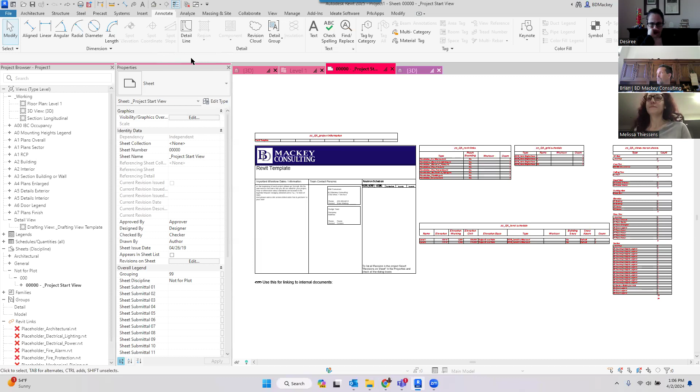The one I noticed right before we started is they're calling it interface enhancements. For those who don't know, Autodesk's eventual goal is to get rid of the options bar, the line of data you get down here. So if I switch to a floor plan and grab something modeled, you'll see the modify wall here, but there's no longer anything there. If we start the wall tool though, we'll see there are options down here. Autodesk is trying to move everything from the options bar either to the ribbon or to the properties.

When I looked at the help, I saw a couple things they've gotten rid of from the options bar and moved to the ribbon or the properties palette. Oh good, the ellipse FYI is one. That's good, they moved the ellipse. Yeah, I didn't even know.

A lot of them are just stupid little buttons they've moved. Like when they did Align a while back, that actually moved then, and the Align one pissed me off. I was not a happy camper because Align used to have the multiple alignments and the lock all down here. Now since it's a ribbon button, it's a separate tool. So when I'm in sketch mode, the align is a separate tool, and I keep having to bounce back between finish sketch and modify align. So this one I was actually upset with. The rest I'm like whatever, but this one added more clicks for me.

But yes, those things are slowly going away. Autodesk eventually wants to get rid of the options bar entirely. They've said that, but I don't think it's going to happen any time in the next decade, to tell you the truth. As they make modifications, I get back that precious 3 millimeters of screen space. Next screen space, yeah, exactly.

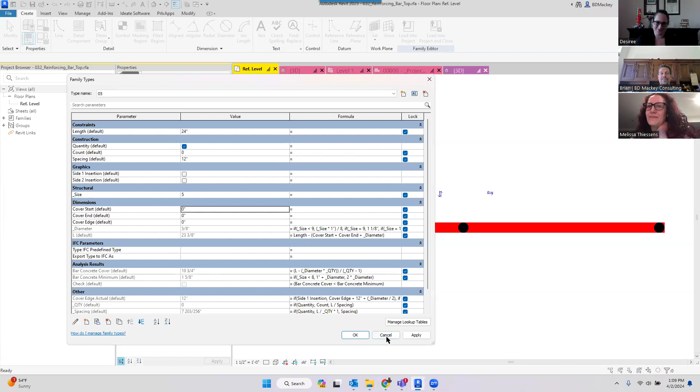So I started to realize on a lot of my families, holy crap, that's not really going to work for me because I'm using that quantity check in formulas.

However, I did have one that I did just open up quickly and it did work. On this one here that I opened up and played with, I have a masking region over the top of a filled region to represent my brick quantities.

If I came in here and I have like a king size brick - wrong button - let me look at that king size brick, which I probably have in a type catalog, where I had like 5 holes. Cool, here's my 5 holes. I hit apply, now it's giving me the 5 holes.

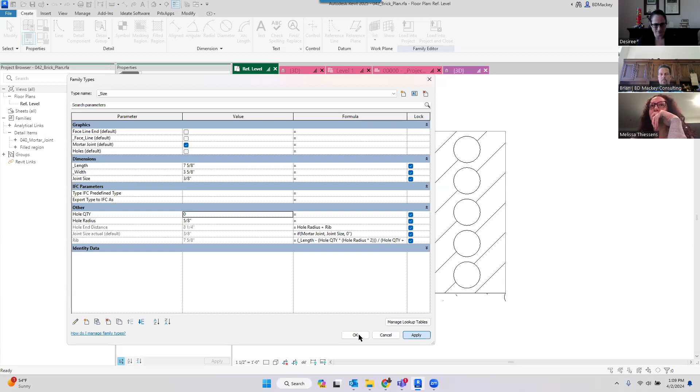But the nice part is now if I come down here and say, cool, I want 0 holes, it will allow me to do that without breaking. All it's doing is turning the visibility on to these.

So it's a little bit weird that the visible button is still visible, but when you're taking that array down to a value of 0 or 1, it's going to automatically take the ones in the array and basically say, cool, we're going to go in here and start looking at those.

So I thought it was kind of weird that it's just graying it out. Is it just excluding it? Nope, it's not excluding. I was wondering if it was looking at it as a group, because when I tab selected that, I got the group icon, which I didn't notice before.

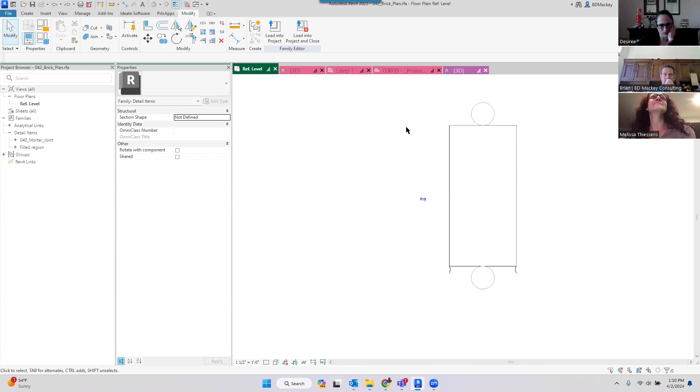Is that because you have your array defined first to last? I wonder if it would do something different if it was first to second. I don't think so, because if I come back in here, we can actually change that in play.

If I come in here and said, oh no, give me an array of 1, I can say okay, and then mine does center it, and then it does make that black again. So it's nice to see that I actually had formulas in here to move it to the right location. Ooh, if there's only 1 hole in this brick, it centers it.

Kind of cool. But I do think it is going to take some of these families getting into them and looking at, hey, what do we got going on? What are we doing here?

It was kind of the same thing as like when I was - nope, not that one. Dang it, wrong family. Recording in progress. Oh, Melissa's now in here twice. I'm muting the other Melissa. There we go.

So it was funny when I came back in here, like I said, I went to my recents, I looked at this void form one. This is one, and I'll show you kind of the steps that I usually do. If I look up at this array, I've got one called quantity actual.

Most of the times what I've done is I've created one that basically says if the quantity is less than 2, give me 2, otherwise use the value. That's how I've been able to come through here and say, oh cool, somebody came in here and gave me a quantity of 2, which in this case is all based off of the length.

If my length came down here and went to 12, then my quantity is going to go to 2. If my length went to 8, my quantity technically goes to 1. But this one says, yeah, no, screw you, I've got to make it 2 anyway.

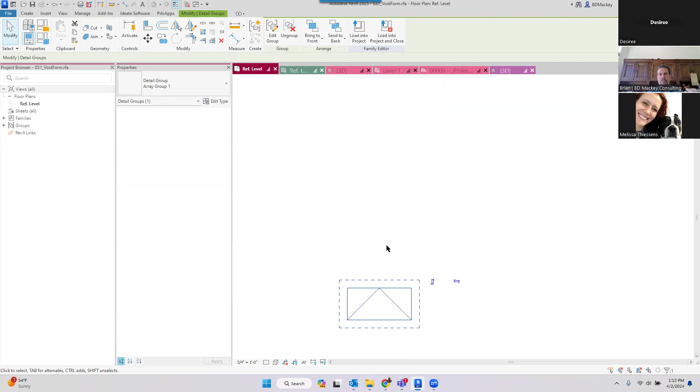And then what I've done is I usually have - it's actually working here - values where I have another instance on top of it. And as Desiree has found a couple times, that sometimes results in double counting. What's happening here is the two that I'm getting are literally just going on top of each other.

So I've got a value here where my array - I'm gonna go change my length value to be like 16 or something again, whatever. My length value here starts coming in, and it's just doing a first to last - they go on top of each other. So when I give it a value of 1 inside of there, it actually puts 2 on top of each other. But now, oops, cancel that.

If I come back here and grab this and just say, cool, let's just use the actual quantity button, not the one where I'm saying make this 2.

That instantly would have broke us in the past. If my quantity would have come down to be a 2 or a 1 value that was associated to an array, it would just break. Wow, there's only an array of 1 here - I would break. That's what I'm using.

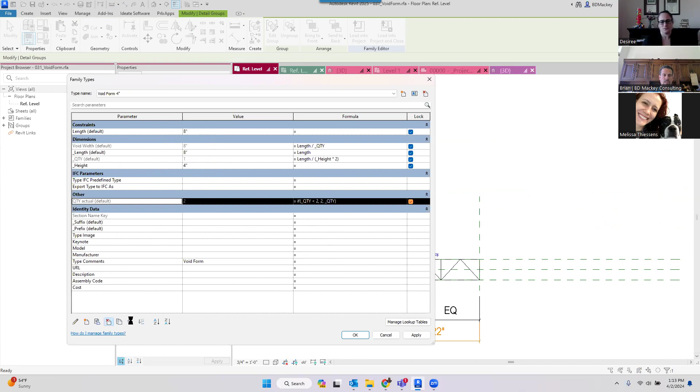I'm no longer using this one, so I'll delete it. It's now going to let me do that, right? You can see there's the gray one on top, but there's still the black one beyond. So they're just hiding those values and making work.

This is the one for me that, like I said, I'm going to be super excited about. I just thought of a family I could go open. If what it's doing for 0 is just moving away, I wonder if it's not going to solve the double counting anomaly. It's turning it off, but yes, I don't know. So I'm gonna have to go in and actually - good question. I'm gonna have to go in there and start to see.

We'll go to 23. I just thought of one that I could actually open and play with this one where I have things on top of each other. Furniture - it doesn't always double count. It's weird, like sometimes something breaks it.

I don't have that problem as much. So here's a perfect example: you can see I've got these two that are part of an array, and if I hide those two, this one's just an individual one. And this one's just got a visible parameter to it that basically says, hey, Chair End 2 single, right?

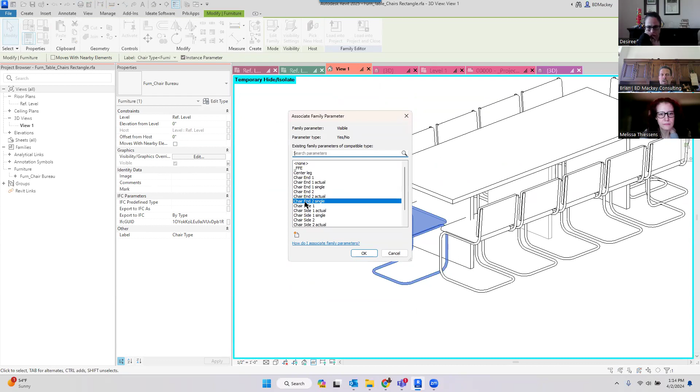If I go look at this one, the Chair End 2 single is basically coming in here, and it's a formula saying if chair quantity equals 1, turn it on. If it equals 2, turn it off, or inverse that, whichever. So we've got that basically setting up here for the single value.

So now I don't think I would have to do that, because if I take this one and just delete it and we go back to the restore, if I now were to come into my chair - I'm not sure which one I did, which value is this one? Chair end quantity - so just chair end. Wasn't sure if I had one for each. Wait, did I say chair end 1 or chair end 2? Chair end quantity, actual 2, so it's chair 2.

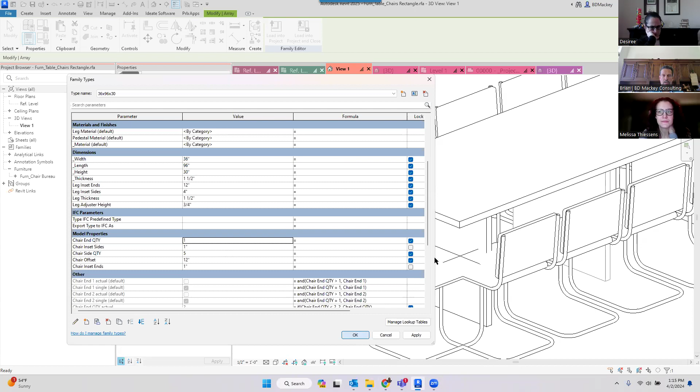So if I come over here now to chair side quantity and chair end quantity, if I were to make this 1, theoretically - well, it's still going to show me 2 because I've got to go fix the formula. Hold on, let's just go back and make this one just chair end. Chair end, quantity of 1. You'll see it's just graying out that one.

Wow, that's not centering it. No, it's because the way I set this - because again, I probably did this one, I just said, hey, align it to the ends and call it a day, and that's all I cared about. But so again, this sounds great.

We can now have 0s and 1s. I'm gonna have to go back and rethink some of these, like if I only want 1 chair in here. But now I'm not gonna get that stupid warning - oh, results will count in double counting because there's elements on top of each other, where I was putting them on top of each other.

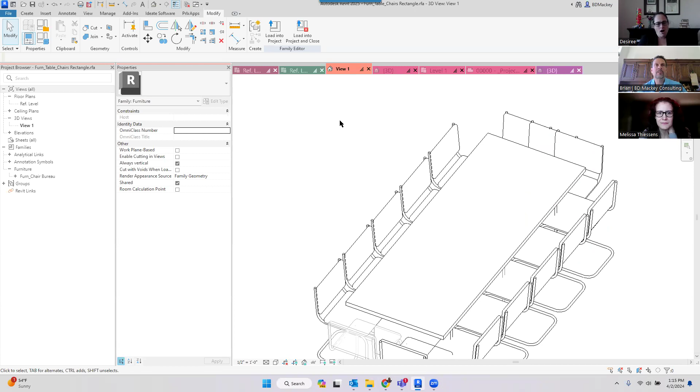So hopefully we'll be able to play with this. I don't know how much. It's kind of like when we originally got the - when you have a void, you could say cuts geometry or not on the void. I didn't fix a whole lot of my families where I was moving the voids up and off because I'm kind of like, is it worth it? I don't know. If I readdress those families, I'll go back.

But to me, that was one of the big ones. Feels a little like future families will benefit, but maybe not worth going and breaking all your old stuff. Yeah, that's kind of what I mean.

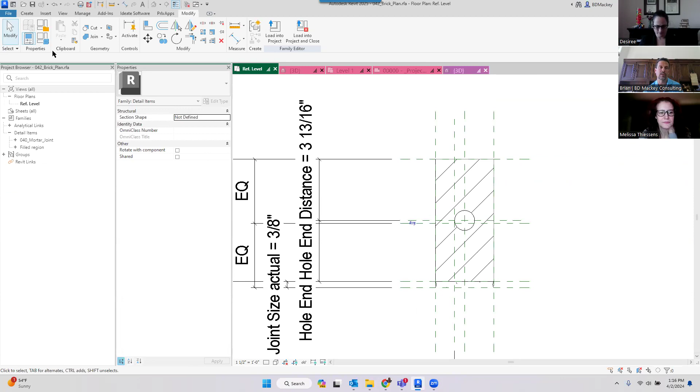Some of these I might go in and play where I know I'm having issues. And this one, the only reason I'll go into VG and turn on all the annotated stuff - this one moves the circles outside. So like I said, I haven't totally played with this, but that's only because it's moving the circles to the outside when I make that value 0 because of how I've got this set up.

Oh, an O is not a 0. Close, I hate it. I hate the O key right next to the 0 key. So that's the only reason, because I actually have some sort of value here. It's like, hey, take it. So I'm technically moving it past the other end, and the way my formula is set up for the hole

Distance. I don't think this is going to affect the family, but again, we load it in. If I now can start aligning to this reference plane or whatever, it might blow it up. But so that's there. That was kind of one of the ones I was really, really looking into. So a couple of the other tools that they've got.

I don't know if I like this tool. I've been very adamant in the beta forums that I'm not sure if this is a great tool, but one of the tools that they have now is when you're creating a wall, you have this auto join or auto join and lock.

So this auto join and lock, what it means is that, hey, if I come in here in a perfect case like this, I've got this wall here. If I come in here and model this with the auto join and lock turned on, now if this wall moves, did I not have it checked?

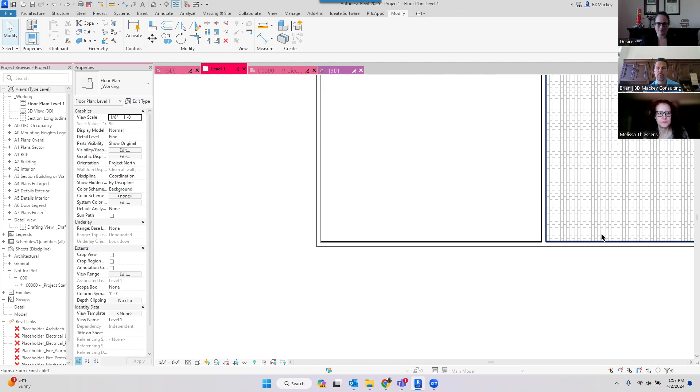Let me try that again. I probably deselected it. Let's go to the wall command. I probably turned it off. It is not highlighted, so if I turn it back on, it's got to be highlighted.

Very simplistic. I don't also like the interface here. It's pretty non-apparent that that's there or not.

So if I come in here and click this and I go across, right? Now it was turned on. You'll see that I now get the padlock, so that wall has been constrained. So if I move this wall, the one that's been auto joined and locked works.

The other theory on it is if I go create similar for a door, theoretically it's been auto joined. So if I put a door in here, then theoretically it should cut the opening out.

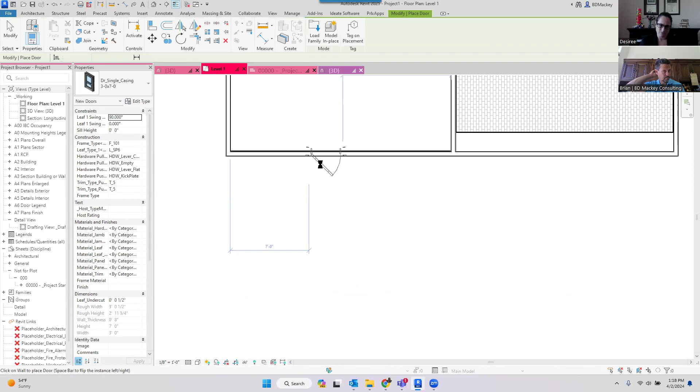This is the- I probably hosted it into the thin wall. Let's try that again. I'll host it into the fat wall, not the thin wall.

Actually, I wanted to use a different door because I did try it with that door earlier, and it was not working earlier, which I want to see- I want to see if I've already found a broke feature on this.

I just want my door single. Sure, the door double will work too.

So this is the thing I said, theoretically it's joined, so that should be getting cut out. I have not had that work for me. And if I go back to do the join tool, it's already thinking they're joined, so I can't join this wall to this wall because they're already joined.

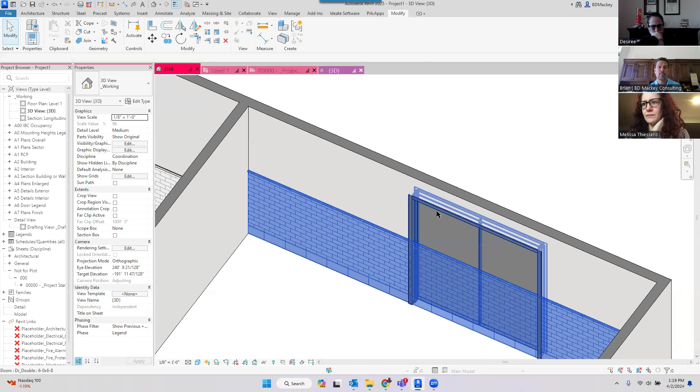But for me, this new feature has not been working in my template. I haven't tried it with out of the box, but if I add a door later, I have not been seeing that that's working for me.

So we'll do a new wall that there's a door already in there. Auto join and lock is on. It's not joining for me. I'll try it. So this is me in my template. It might be working out of the box template.

So that was kind of the things for me. Worked out of the box. The other thing, let's pull one of these walls back.

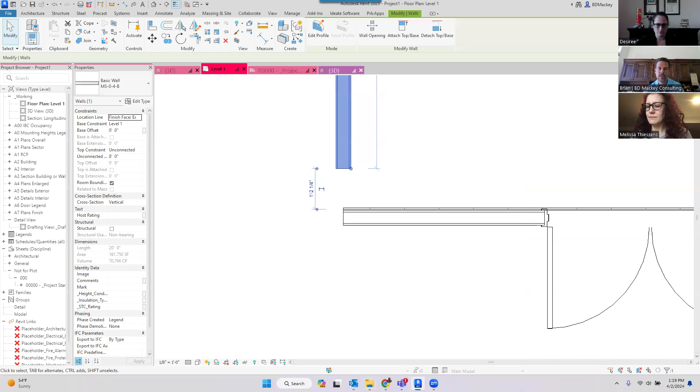The other thing that we'll start to see inside of here too, theoretically now there is the auto wrap feature. So if I go back to the helps- that's not the helps. If I go back to the help button down here, the other one they had is create walls. Nope, not that one. Where is it?

Yeah, in canvas wrapping, wall wrapping controls. So theoretically now, the way we get the wall that can wrap at the end, we should be able to come through here and start saying, no, I don't want, or I do want that to wrap, which to me, this is a big deal. I have a lot of clients who create walls that have gypsum board on the end, then the identical wall that doesn't have that wrap happening on it for their floor plans.

So if I go edit the type of this wall, I think wrapping has to be turned on. So wrapping at ends, I'm going to say interior, sure. And now when I grab this wall, you'll see, since the wrapping has been turned on, you can choose to turn that on or off.

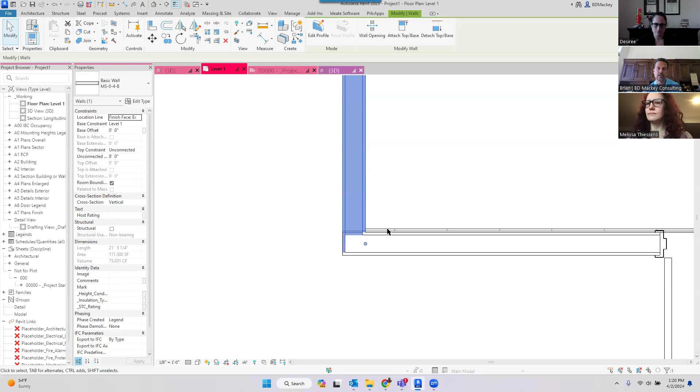To me, this is kind of one of the features I like. Obviously, you're only going to get that if the walls are unjoined. You're not going to get that if your walls are joined, etc. So that to me is a nice little feature they've added. I don't use a whole lot of this tag toggling, but now it's nice that you can go through and set that up.

The other thing that confused me slightly when I was in the beta is this join, or the auto join and lock up here, is different than the join status down here. This join status is talking about at the ends. This auto join up here is talking about walls parallel to each other. So I did think that was a little bit of a confusing part for me.

Is that architectural walls only? Like, join, yeah, because I just opened it to try it and it's not there for a structural wall. Is your auto wrap turned on? On the type properties of your wall. No, the auto join and lock button's only there for an architectural wall for me, so I don't know.

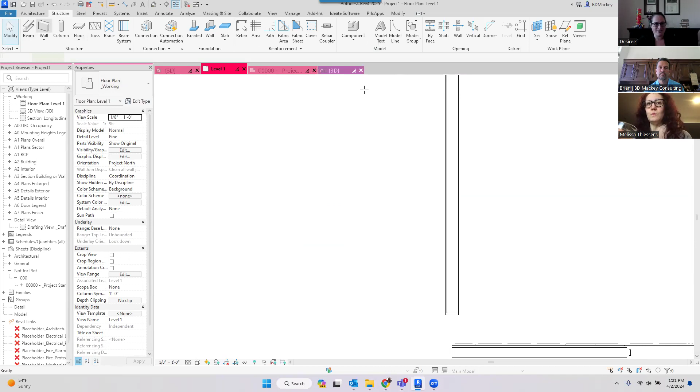Oh, let me see. Structural wall. So you're correct. Screw you, Autodesk. Why do you forget about the structural engineers?

Why are you not in the beta testing this stuff to tell them it doesn't count for structural walls? I don't have time. That's what I have you for.

Really? So you were correct. In the structural wall command, that feature is not there.

Kiana's crying right now. I can hear her.

That is dumb. What if I do it as architectural with the lock on and then switch it to structure? And then I do see that Javier posted a question in the chat. He doesn't use it because you can't actually snap to the stud end point.

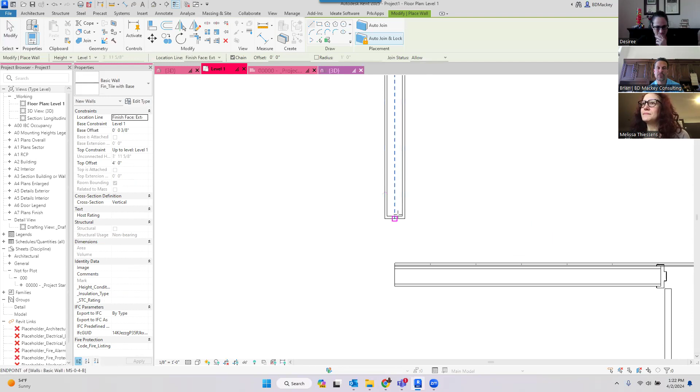You are correct. With Revit, this isn't actually modeling that. If we go back to 3D and look at it, it's not actually putting the gypsum board on the end of that wall. It's not doing that finish. It is just a graphic 2D representation in plan.

I will say Autodesk has been talking about actually making all the walls layered systems, not pseudo-layered systems like we currently have, literally to be more like the parts tool if we had the parts tool. That's kind of what their goal is going to be for this. I know it's a multi-year process, and I think some of these edits are what they're talking about with multi-layered walls when we get those. It's like theoretically I could model a wall and pull the gypsum board back.

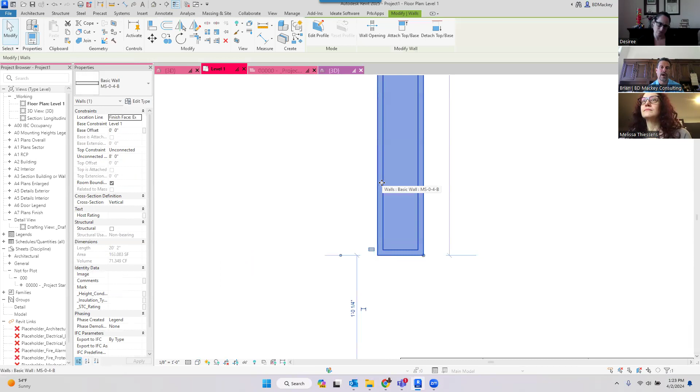That's something they've been discussing. I don't know how far out it is. It's in the ideas forum, it's been places that they're talking about it. So it is there that they're talking about it. So who knows?

Somebody asked, does this work with inserts too? I don't know. Let's go throw a door in here. Let's go to my door. Let's change this to be an inset door. And let's make sure we have the wall closure for the exterior.

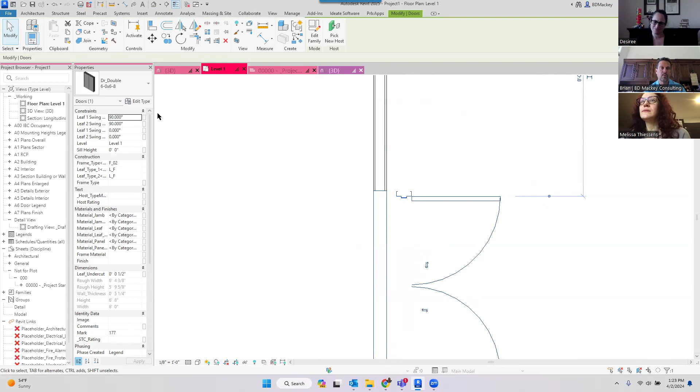Probably should be using it out of the box here to see if that works, but put it there. Let me add a type on that, and let me go make that distance. I have this on mine to be adjustable. I don't have it automatic. So let me just go through here and check.

I believe it's only on ends. So we've got that there. Now we pick the wall. Yeah, I don't believe it's at openings, I do believe it's only at the ends. But I wonder if that's because I'm doing that control via this.

Let's go to here, say edit type, and let's say wrapping at inserts, let's say both.

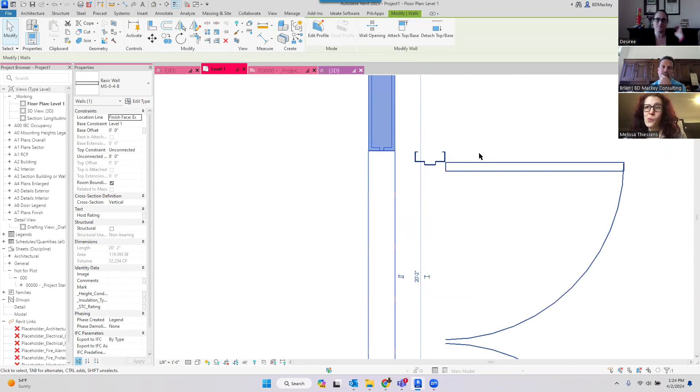Uh-oh, there it goes. Let's go to my door and change it to be by host. So, nope, does not give me the capability if it's built into the wall. So not at openings, only at ends.

It's not totally fully baked.

FYI, in case you didn't know, if you noticed I had my wall set to none, do not wrap at inserts. Most people don't know that any wall-hosted family with a door or window has an opening built into it. The opening allows you to choose what the wall closure is. By default, that comes up as by host, but you can switch it to whichever you want, or neither. So even if the host says wrap it, you can say no, don't wrap it here.

Don't remember who asked that question, but if you don't want this one door to have that wrapping, you can create a door type and set it to neither. Even if the wall has it, you can turn it off that way. That's always been there.

The door works in my template, as does modeling it as an architectural wall with auto join turned on and then changing it to structure. So it's now working with my door family, I just got to figure out why.

When I went to my simplified door—time to rebuild everything. Yeah, no, I don't use that tool anyway.

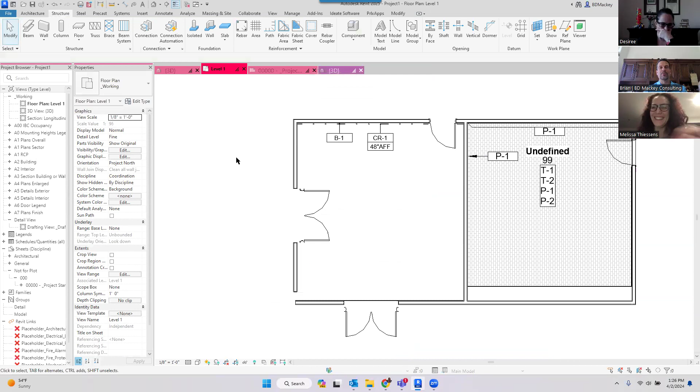I feel like I get all excited about something and then it's like, oh, but it only works 80% of what I need it for.

Beth asked, am I using voids or openings? Yes. If you hover over my family or select it, you see little blue rectangles, Beth. The opening cuts the wall, and then I have a void family built into my door that I use to cut the finishes. I think it's the wrong 3D view—I'm even using Neat UI with the color-coded 3D view, and I still can't click the right button.

Man, I was gonna say.

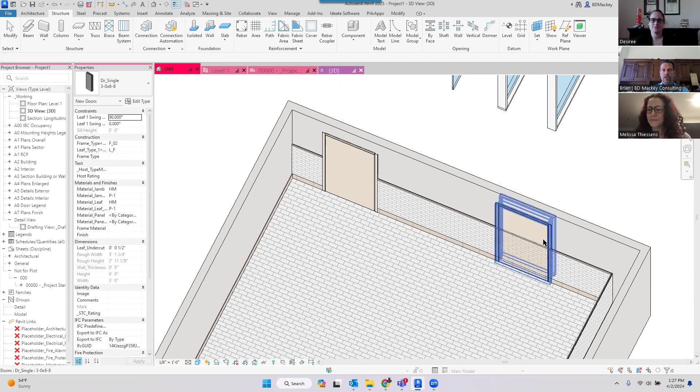So for me, when I place a door, I'll create a new one, put it in, and flip this door. One more flip—you'll see that when I go in there, it's actually cutting a hole through the wall, and I'm not cutting the finishes here. So for my door family, I built a void into it. Again, you can see the void if I hover over it, because I don't use join geometry here—because if I did...

If I come up here and say join this wall to this one, it breaks with my door. Undo that—let's join this wall to this one, the opposite direction. So my doors are just broken on the join in 25.

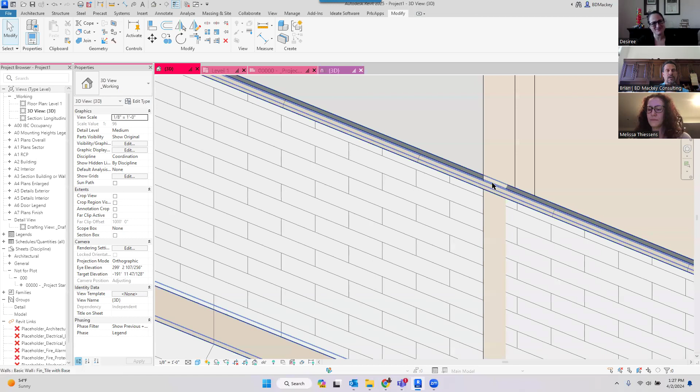But in 24, if I did that, this would go to where the opening is, so my little trim piece that comes across here would get cut halfway through the casing, which I don't want. So I built those void families in there so I can use the cut tool and say, let's cut this by the door.

Yeah, it's really freaking out. Let me go unjoin real quick—I should have really tried this in my 25. My family's in the 25 beta. So let me try the cut tool again and cut this by this. Sure, it's breaking, but that's theoretically what I did here. I'll have to see what's going on in my 25 stuff.

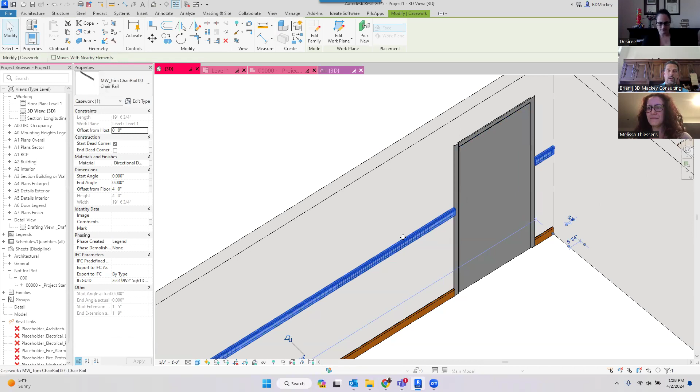So I use the cut tool so I can get this to cut where I want. The other reason is this is not a wall-based family—this is a generic model, or a casework family. If I wanted to cut those around the door as well, I can still use my cut tool utilizing those voids. That's why I do that, Bev—I build the voids independent of my openings so I can have a higher level of flexibility with that.

So any questions come up on the things we've been showing so far?

I guess Rick had one. So if you're using array as a void, like the sinkholes for a countertop, it will actually get rid of the holes if you say only one.

I don't know, I have not played with that yet, Rick. I don't imagine it would, because usually if a void is cutting something and you turn the void off, it's not cutting it. It's just telling you not to make that void visible. So I can't imagine, I guess we could try something real quick.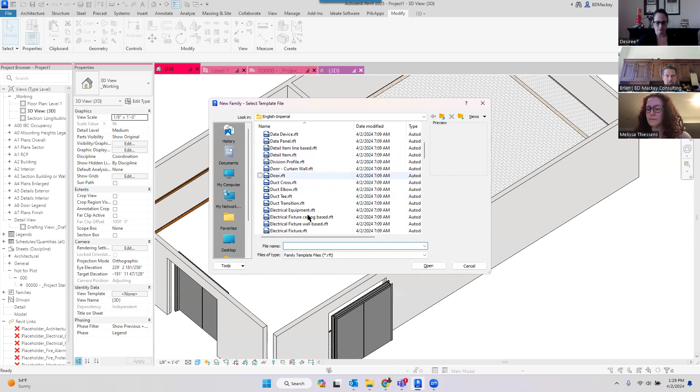Let's go do a family. New family. Generic model is fine. Not adaptive.

Let's create an extrusion. Let's do a rectangle. Woohoo, that's not a rectangle.

Has this always been up here? What's the depth, or is that new as well? I don't recall seeing depth in the options or in the ribbon as I've created extrusions or solids in the past, I've only been in the annotation family so far. No, I'm in 24, and prior was that there?

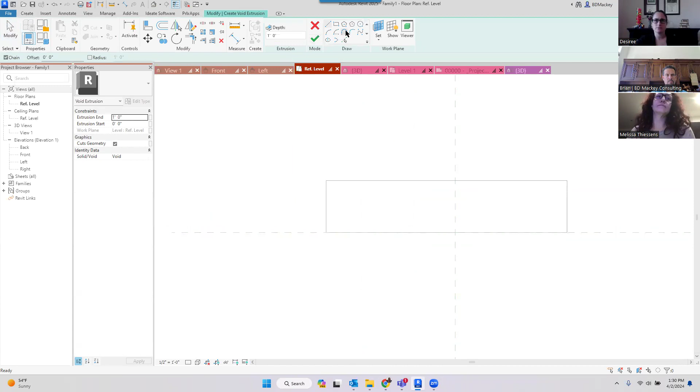Cool, let's go like it with - create a void. Do a void extrusion, we'll do a circle this time right here. Cool, we'll finish it.

We have that there, so now if we take this and array this, we'll move to last. Oh wait, Desiree had a question on move to second, so we'll just do a move to second. Oh yeah, I'm curious what it does.

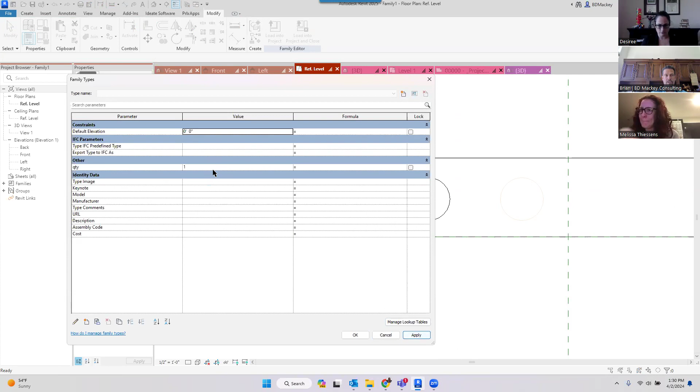And then we'll grab this and we'll parameterize it. And then we'll come in here and say quantity of 3, make sure it's working. Cool, quantity of 1. No, it actually is quantity of 0.

Wow, so yes, it's probably somehow using the cuts geometry to disassociate that. But yes, so to answer your question, Rick, yes, it does look like that's going to work for us.

Is it going to work in the project environment though? And then I'm still curious about the counting, because if it's just toggling the visibility checkbox, that's essentially what we're doing on our own prior to this tool.

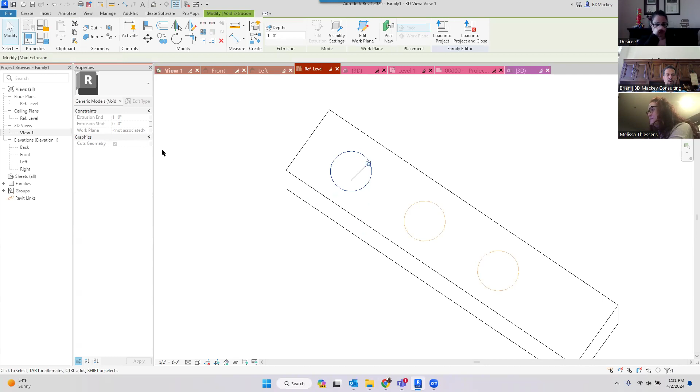I don't know, because it's not technically toggling it. I mean, that's the whole thing - when you go down to it, the visible and the cuts geometry, whatever, it's not unchecked. So I don't know how it's working, but yeah, that'll be a thing.

Let's delete this. Let me go insert, load family. Well, I have that one that is currently not working. I could just open it, we'll go to my folder.

Oops, we'll go to my folder. Sorry, I don't have any of my shortcuts set up yet, I literally just installed this today. Mackey, Revit families, we have to go to 24.

Let's grab something I know that would be nested, would be furniture. We'll grab a chair. Nested and shared, yeah, it is.

So we'll load that in here. Furniture chair task, put it in here. Cool, let's array this.

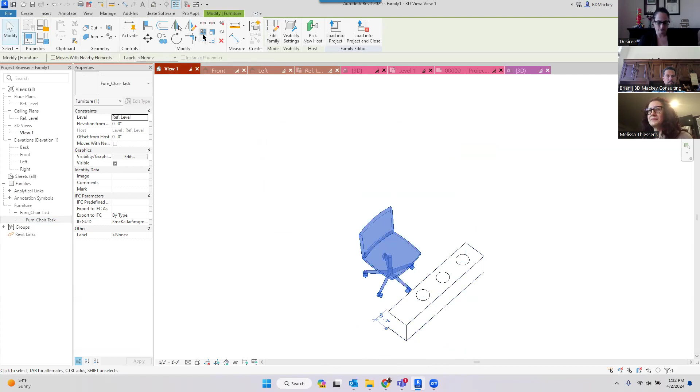Great, let's grab the array. Let's add it to my quantity. Let's load that into a project.

Place that very sexy family right there. Let's go - I shouldn't have made it. I should have made it an instance property, but who cares. We'll go back and say 0. And then we'll go do a furniture schedule.

Oh, they changed something up here also, for everybody to know - the filters here, they've switched categories or added categories around. So in your filters up here, this is also a new feature of 25. They added or removed some things, like some of the things they thought should have been mechanical or whatever - they've changed some of those around. So that is also a new feature of 25.

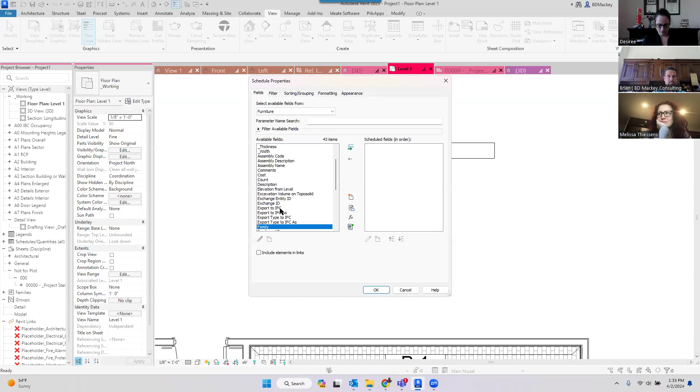Family and type, count. So currently we have 0. We go back to this and change that value to be 1. We'll make sure that schedule says 1.

I probably should have tiled that view. And only 1, so hopefully that will fix it. So the voids work, so hopefully all your new stuff, that's going to work for everybody. Who knows, I'm just guessing here.

I'm gonna try it with the one with what I know is broken. Yeah, it's gonna fix some things and break others. That's right, like I said, when the whole cuts geometry tool or the cut void tool came out where you can add a cut or not cut geometry, I was like, yeah, I'm not going to go back and fix any of my families that use that.

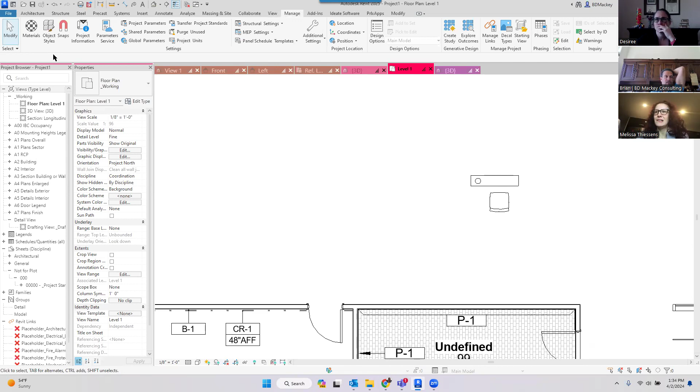No, I'm good. And then so something else, and I did see this as a question, is they theoretically changed something in the material browser. I honestly don't know what they changed. I opened this up real quick earlier and I'm like, okay, it looks slightly different, like different fonts or something.

But I honestly did not know what they changed inside of here, and this was one of the things they said was a new update. I just gotta remember where I saw it. If anybody sees it and I pass it, let me know - material browser improvements.

Quicker thumbnail generation. Sweet, there you go. And oh yeah, this was a big one. I did play with this in the beta.

Batch select materials. Before we were not able to grab more than one material in the browser. You can now grab more than one here. You think, oh my God, we can grab more than one, and then we can delete them, or change their names, or add them to a material library. Oh my God, we can actually do that now.

Or change something like the keynote on all of these, right? The fact that we can now do this is big. I had issues before where it's like, cool, I want to make all of these this keynote or something, and it was like, oh my God, seriously, one at a time.

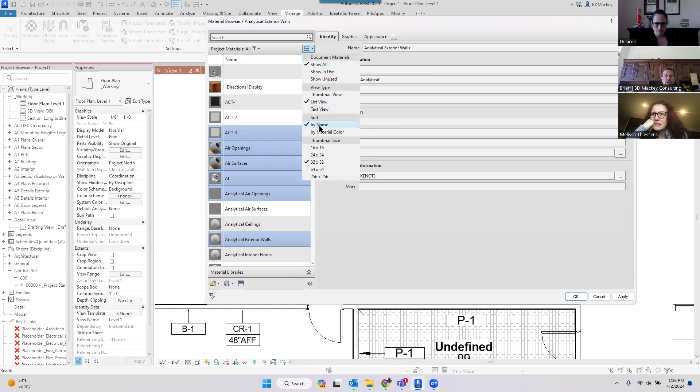They did also talk about faster thumbnail generations. Honest truth, and this is something I tell everybody, I don't ever have these set up by thumbnail sizes. For me, I only ever do text view. I don't have images on there because those images take a while to regenerate. I don't ever display them. I'm always set up here to be text view, not list view. I see some people who do this and they complain that their material browser takes like 20 minutes to open. It's like, well yeah, you have 5,000 materials in your project and it's got to regenerate every single one of those. So for me, I'm always text only.

Also, when I go to the appearance tab, I don't have this icon super huge. I go to some of my clients' offices and they have it like this, and I'm like, first off, I don't want to have to scroll down here. But second of all, it's got to preview those, you can see the generation taking. I collapse that. Until I'm working on it, I don't even need to see that thumbnail. With no thumbnail, my dialog box opens up pretty quickly.

Since we're on other tips, I don't think everybody understands that you can actually say, only show me what's in use in the project, or the unused ones in the project. This is going to be great because now that I can select multiples, I can be like, cool, these aren't used, delete. I no longer need to use the purge command. I can just come down here and say, hey, show me the unused versions.

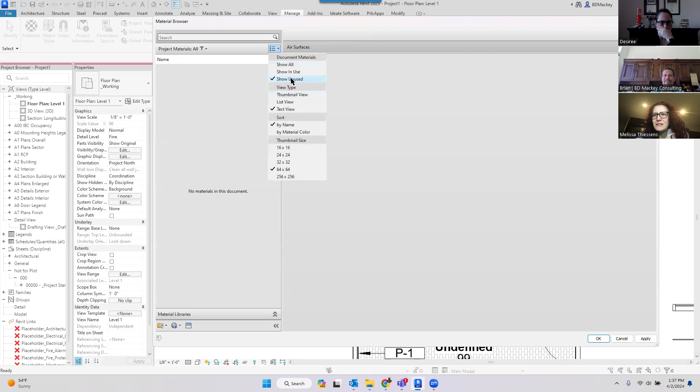So yeah, you have those options. The other thing a lot of people don't use is the filter here. Personally, I have all of my interior materials filtered by interior materials in my template. I have all my exterior materials separated by exterior materials, and same for structural materials, etc. This is how I can quickly find my materials in the browser when I'm looking at it.

Oh, I lost it. Oh no, it's because I had multiple selected. I was like, I lost my tabs. It was only because I had multiple selected.

So how it uses the filter over here, it's whatever class you have, that's how it filters these out over here. I really wish we could filter a schedule by these. That would be freaking amazing, but class is only used for here.

So FYI, yes, that's the new materials thing: multiple select, and then the thumbnail preview if you have thumbnails turned on.

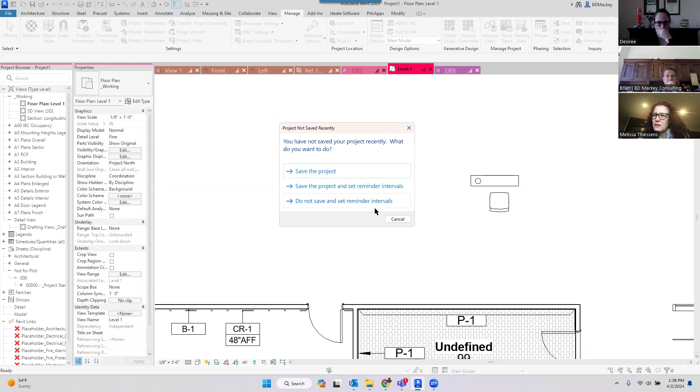Looked like it was a pull down menu though on the appearance tab. What was that? It looked like it was a little pull down menu on the appearance tab. Oh, on that, on the help file? Yeah, render settings quick. Oh, good catch.

So, in the scene, that's over here in this one where you've got the scene. You've got the environment, render settings, quick, draft, production. Now is that per material?

But now you can multi-select.

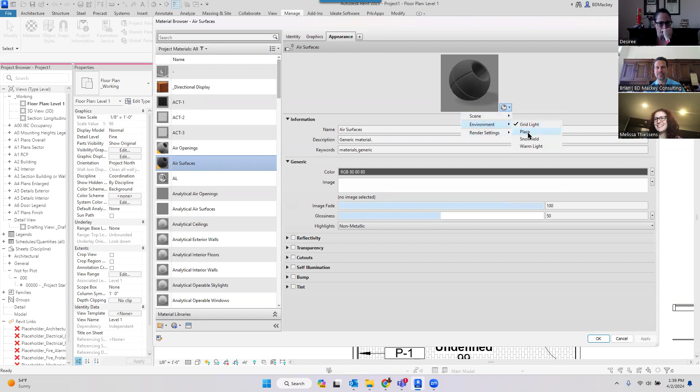Oh wait, the appearance tab, I was going to say that's per material, and that's not a system setting. That's going to drive me crazy because the environment's per material. So is the scene, the scene I know is per material. I don't know, is the environment per material too? Yeah, so these ones are global. The scene is per material.

Good catch, Melissa, I did not see that. Yes, oh my, always put that on quick. I have no idea why you would ever want to be in production quality in here personally, but.

Now I'm curious, was that there before? Was there some sort of setting in here before that was like draft to production, and I just added quick? So who's 24 open? Whoever has 24 open, just out of my curiosity, check that out for me.

So yes Simon, that is your change on the material browser. And then the other thing they started talking about, and I have not done this at all, so we are all going to learn this together.

They now have what are called sheet collections, and I don't even know where to get this. I played with it originally. Sheet composition, you would think it would be here. Maybe it's down on the right click on sheets.

Yep, so you will see the sheets icon also, I believe, changed, but where is the sheet collection? Number 2. New sheet, boom boom boom. Dang, I'm actually going to go off to the help and figure out where this one is.

Let's go back. Literally said sheet, and then new sheet collection. Just saying. Yeah, so theoretically what's happening, I right clicked on sheet and said new sheet collection. It did not come up. Am I missing something? Sheet, right click. Oh, right there, I'm just blind.

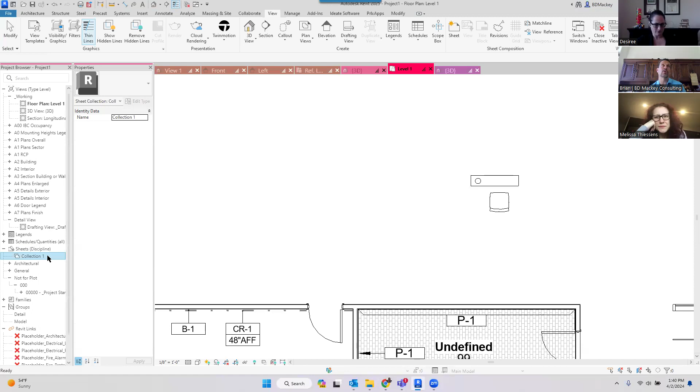So you can now have what are called new sheet collections. What this is allowing you to do, and I think I have a lot of clients who are going to benefit from this, is like, oh gee, we've got package 1, package 2, package 3 for all these sheets to go out. So you can start creating different sheets. I think that's probably a bad example. Maybe I'm doing one building and I'm going to do one permit set, another permit set, and an additional permit set, right? Not necessarily package 1, 2, or 3, because that could imply just different phases of the project.

Where it's going to be nice is the fact that if I come in here and call this collection 1, and we'll do a new sheet collection and call it collection 2, I can then grab these sheets and say, cool, I believe you just drag and drop. So if I grab this sheet, is it a property in the sheet collection? Yeah, so sheet collection here, I can now say, cool, I want this to go be part of sheet collection 1. All right, so now I've got my A101s on sheet collection 1.

I can right click on collection 2 and say I want to do a new sheet. Sure, we'll grab that title block. Here's the bizarre part to me. Under sheet collection 2, I can also come in here and give it the same name. So I have A-101. If I come down here, I can give this the same name of A- wait a second. No, A10, right here, you'll see that I now have an A101. Let me give it a dash.

Is the other one space dash? No, just dash. So it is allowing the same sheet numbers as long as those sheets are part of different collections. Now if I were to take this one and be like no no no no no, I want to go move that to collection 1, it's going to tell me that's already in use. So we're now able to have sheets with the same sheet numbers, sheet names. Well, we've always been able to do names, but the same sheet numbers, as long as they're part of different collections.

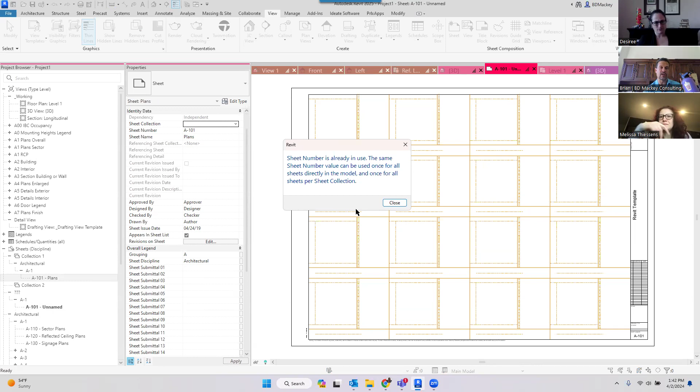Yeah, Marta's like, the jury's out on this one. I haven't played with this one a whole lot into this to see what's going on, to see what's going inside of here. I haven't played with that. My other question is, can I just drag and drop it?

Collection 1. You can also drag and drop. I remember beta said it was drag and drop, but it's also properties as you start looking at it, so I haven't played with this yet. Can the collection name be added to a title block? Ooh, that's a good question.

Family, let's grab a label. Schedule that, crap, I hate that. Who else hits the wrong edit every time you're editing a label within the family? Am I the only person who always hits the wrong one? No, no, you are not.

Key collection, so yes you can. Crap, actually it helps if you hit the double click button. Nope, don't want scale. Sheet collection.

Now you have to go see if it's a field in the sheet index. Sheet collection, load into project and close. I think we're in project 1. Come on sheet index, big money, no whammies. I know.

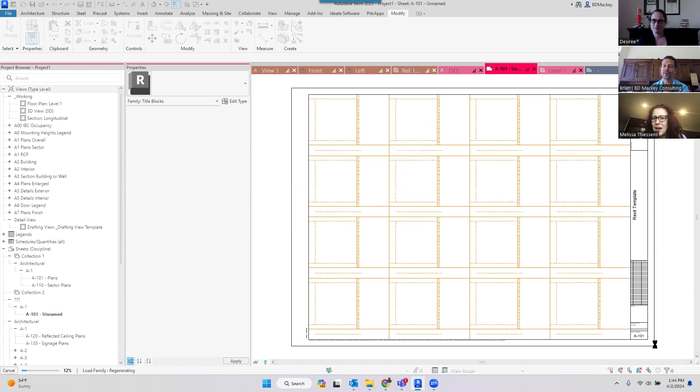I always hate editing and loading title blocks because if you have a lot of title blocks, that can be a 15-minute process. Oh, 15 minutes? That's cute.

Did you catch the question about your paint tag, Brian? Nope, okay, everybody's using the chat today.

We'll load this, then I'll let you tell me. So that's none. So if we grab this sheet and we move it back to the sheet collection, of collection 1, cool. Collection 2. Okay, rename this.

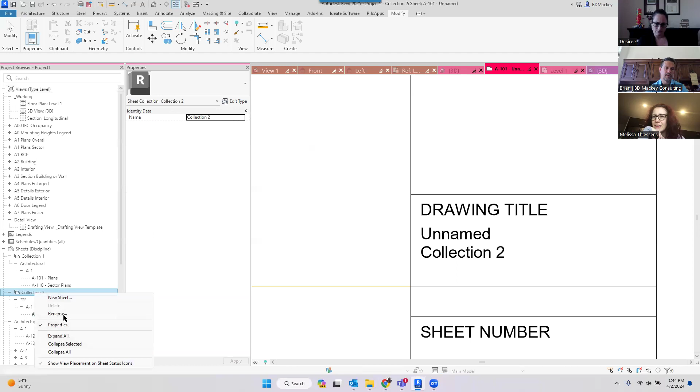This is going to be one of those. Does this actually help? I like it. And then I'm assuming a sheet index at this point in time too. We went to a sheet index.

Prove it. Sheet list. Well, it's either going to be like the way you want it to be, or it's going to be like phases, where it's like when you create the schedule, you call it a sheet collection. Oh, and then I'm assuming we'll be able to filter also by the sheet collection.

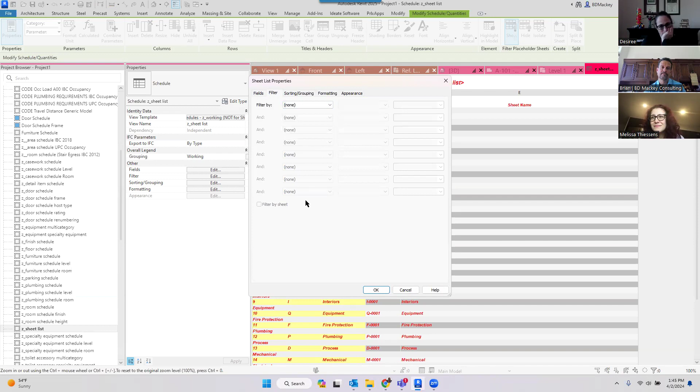Well now we can redo all our groupings. This will be nice because we have like a presentation chunk in our template, which all the presentation sheets you then never want set on there. Very nice.

Okay, and then can you print? Does your sheet collection go? I know this is me showing that I'm in the beta, but I haven't actually had time for that. I can't imagine they would stop it, not allowing you to do print sets based on it.

Really? So my other question is, even though they're already grouped together here, if I come back up to my sheets, 2 questions on that since you asked that question. Let's go down to sheets, browser organization. Can you go to sheets now and edit and filter by just the sheet collection? Yep, yay, so you can filter by the sheet collection.

Cancel, and then let's go to a print set. There's got to be something they forgot. They never get it all, they never get it all. That's true, Rick, he's saying just because you're in the beta doesn't mean it gets rolled out the same.

This is fair. I don't see any way to select. Oh, there you go, it's not in collection. Only see the ones in that sheet set.

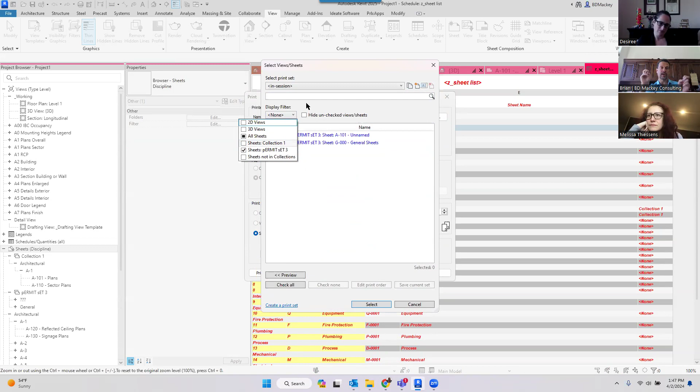Okay, so we still have to add the collection to a sheet set. We'd have to create one for it, but yeah. So as you create new sheet collections, you'd have to add it. So if, say, you already have like 12 million sheets in your template, you can get those all added.

Yeah, so like I said, the jury's still out on this one. I think this is going to be a good improvement for me. I also think that people are going to start using it as a hack to get the same sheet name twice.

But I can think of a lot, because we would do tenant improvements, and it ended up being like we pulled them out into different files, mostly because of exactly that. My brain went on this, because I have clients exactly like you said. They've got an entire building - oh, we're doing this lobby remodel, oh we're doing level 1 floor area. So yeah, I think this is going to be useful.

I love it. Brian, the MEP engineer, is like, cool, I can't wait for Revit that architects to upgrade in 3 years so we can start using it.

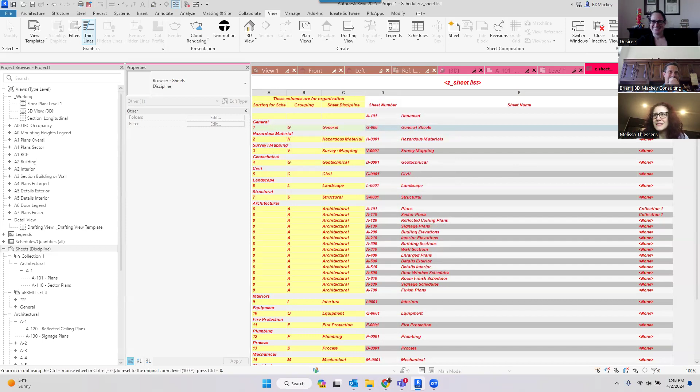Yeah, I feel your pain, Brian. I'm in 22 right now.

Oh, I am glad you said that, Melissa. There's something I wanted to bring up. Autodesk licensing allows you to go current version, and depending on how you bought it, it varies - it's current version plus 3. Some of my clients, Autodesk has told them it's current version plus 4. The reason I always like to point that out is if Revit 25 is out, if we're going back 3 versions, we get 24, 23, and 22. If you're going back 4, you can get back to Revit 21.

20 and 19 technically are no longer valid licenses. The reason why I say this is I currently have a client who's using Revit 19 on a project, and Autodesk is trying to fine them for using Revit 19 because it breaks the end-user license agreement, even though they're on named seats - those old seats happen to be like standalones or network, I don't remember. Autodesk is trying to fine them because they are breaking the EULA by going back more than 4 versions. So just FYI, I want to put that together.

So for you to understand, hey, I needed to get my people to upgrade from Revit 20 - that might be a valid reason. We can no longer officially use 20 per Autodesk, blah blah blah. That's what I've been telling clients, and I've actually gotten 4 projects to upgrade because of that.

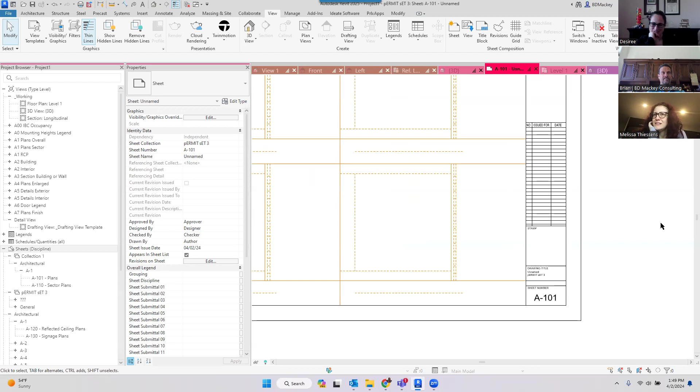So I was just thinking how it's kind of nice not being in that situation anymore. I was just talking to my team earlier this morning saying, oh, we get to decide when we upgrade because we don't have any architects in Revit. So is that worse? But they're all still in CAD? I don't know what's better.

Well, I'm just happy for the Civil 3D people, for all those people who say sorry, I was watching the trash truck, we had our trash way overloaded. When you see the people who are like, I'm waiting for the first service pack - you already got the first service pack for Civil 3D, so what's the problem, people? Let's go, let's start using it. Not the first time that's happened. Technically it's a hot fix, but who knows.

So yeah, that's the other big thing. So do spend some time - we actually have a couple of questions that I think we need to really get into that aren't just about the what's new, but do spend some time.

Go back into the 25. A lot of toposolid enhancements. Exporting to PDF now happens in the background - we talked a little bit about this. You can now align text. I think it's great to have it inside of there. I think everybody at this point in time has downloaded some sort of add-on utility to do this. If you do a lot of IFC, also this is a great feature, but until it works with Revit content, I think it's pointless.

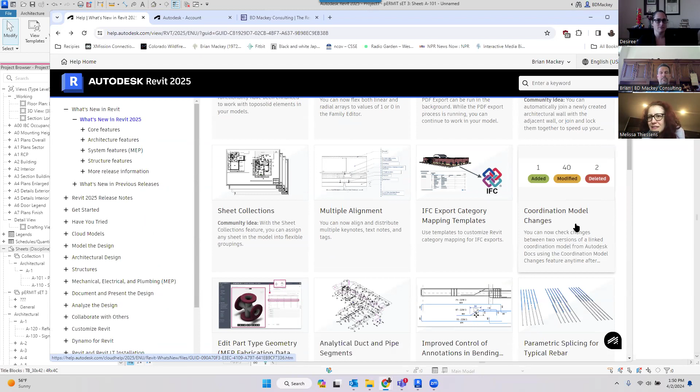If you're using the coordination model, if you go to insert coordination model link, it will tell you what's changed from the previous link to the new link. I personally will never use this because I can see that online and I'm not going to be slowing my Revit down - I can also see it on Revit files online. So it is not set up, and they said they are not in any immediate process to incorporate that into the version of Revit for the Revit links. But you do have this on here if you need to be looking at it.

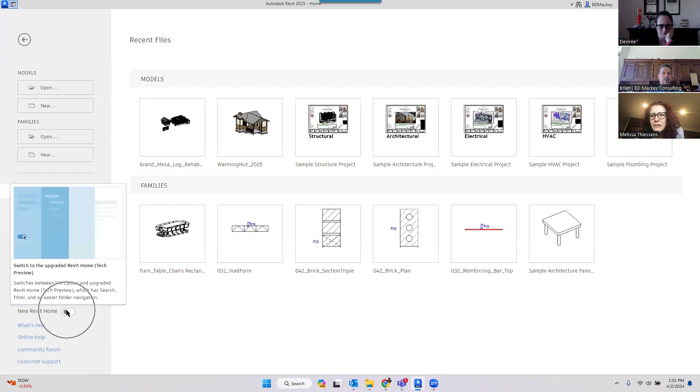So go through a ton of MEP and structure stuff as you guys start going through and looking at that - do look at that. The new Revit home - I don't know why this is new, this has been there for a while. I don't know if you guys have seen this, but if you go to the home, there's a button down here that says let me go to the new Revit home. I personally can't stand it because it doesn't differentiate between Revit and family. I can change it from date modified to type, but then it just goes first to last. I went in broken.

I went families up here or families down here. This also doesn't include templates. This has been here since Revit like 21. I toggled it and went, nope, nope. It is nicer on the Autodesk projects. I do like it there because it actually gives you a tree drop down of what you're looking at. That's kind of cool when you get into it, but for the regular stuff and the recents, it's horrible for recents. So toggle it back and forth.

Philip said he's been using it. Yeah, Philip, you like to adopt those crazy new things. You probably have a black, dark theme background too. So who knows? But those are some of those features that are out there. Spend some time with it, it's new and cool.

So Revit home, what actual questions do we have? Since we've got a couple. Brian, the new Revit home is in 24 and it breaks some projects, just so people know. On larger projects, I haven't really done any work with the new Revit home on your files. So maybe that's different in 25. Hopefully.

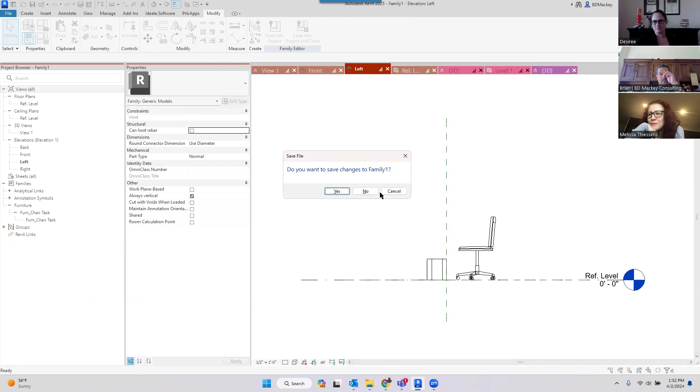So what are our questions? Do you want questions from the chat or questions from the Q&A? Let's do questions in the Q&A. Let's reward the people who follow the rules, do Rick's, because his was first and we've been ignoring it. Oh, Jason says he sent one via email. Oh, that's right, he did. So what do we got? Wait, which one of Rick's have we been ignoring?

Is it just his preload link, I think? Is it possible to change... it says changing a preloaded link from internal origin to shared coordinates, is that possible?

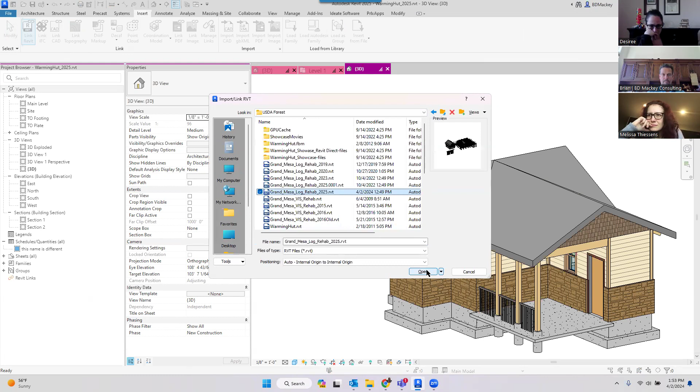Yeah, absolutely. So if you go insert link Revit, since I'm in 25, I only upgrade... I did upgrade another family, I did upgrade another project, I upgraded this one. So I'm linking this in origin to origin. He was so funny this morning, he's like, I've got to upgrade the warming hut. I mean, come on, I've been using the warming hut since like Revit 2006. Gotta keep upgrading that one.

So when you link in a file origin to origin, when you select that file, you have down here shared site. If you have shared site set up, you're going to get move instance to. It'll give you a value that says move instance to these shared coordinates. That's how you can set that up. If you want to go through and say, oh gee, we just brought this in origin, I now want to move it to that. You literally just select the link somehow, you don't even have to select it on screen. Most people think you do. You can come over here and say select all instances in the project. That will select it, so you don't have to open a view where it is. Then you could come down here and say, let's move instances to that.

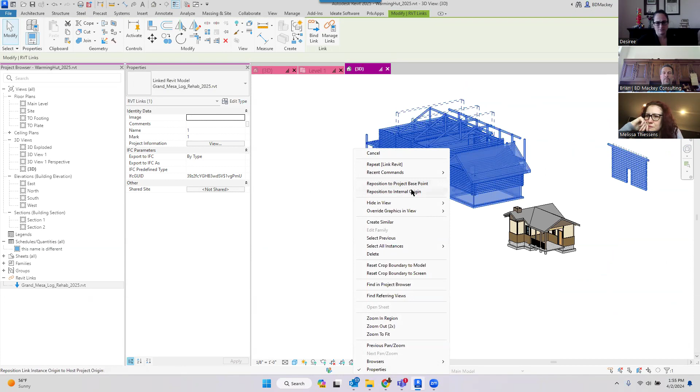The other thing a lot of people don't know is if you move a link, or you're like, did somebody accidentally move that? If you select a link and right click, you can reposition a linked file to internal origin or to the project base point. So you have the capability to go through and do that. It's like, cool, I want to move that back to the internal origin, or right click, I want to move that back to the project base point. In my location, that's going to always be the same point.

But yeah, so that's the case. If you try to move a Revit linked file and it won't let you move it, it says it's pinned but you can't unpin it, it's grayed out - that's because the shared site is set up. You have to come down here and basically say disable shared position. If you're trying to move one that's set up via shared and you can't, it's because you got to go into your shared site and change its sharing position. I forget what the terminology actually is. Or you can say move to. So yes, Trevor, whoever put that, there is a way to do that.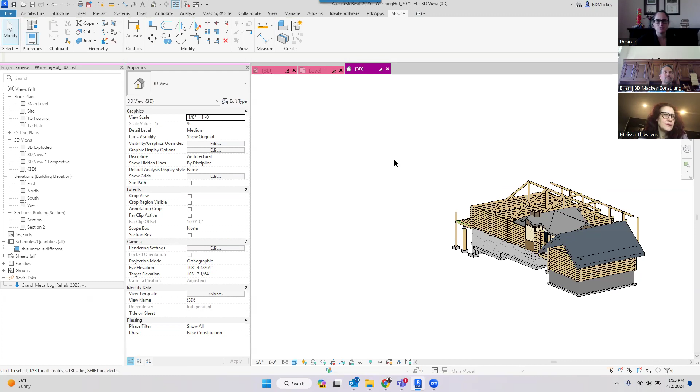I think I was sort of paying attention today versus other days I don't. Your internet problems, I know. It's like a third world country down here. Who knew? Just kidding, Australia.

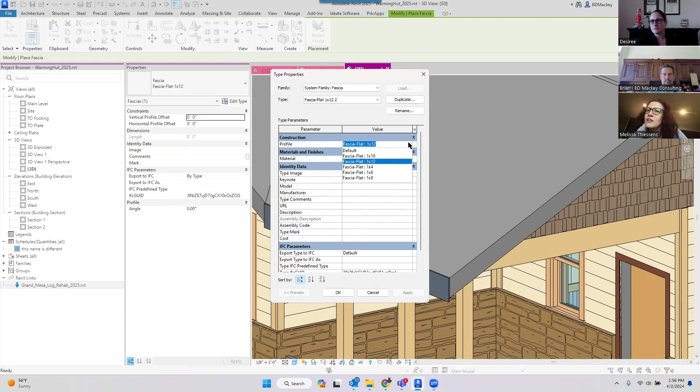Okay, so Trevor's got a fascia question. Is there a way to have fascias of different heights that abut or join each other nicely? For example, we have many projects that have an 8-inch fascia on rakes and 6 inches on eaves. Unfortunately, when dealing with fascias, the only way they'll clean up is if it is one fascia. So even in this case, I did this fascia here as its own fascia, it's a 1x12. This one I came over here and did, I think is a 1x6 or whatever.

Even if you're doing this, if I come back and say, cool, let me go create similar on this, and I'll do another one here, and then maybe I hit escape and I come back - oops, I forgot I linked something in way over here. And then I come back and be like, cool, I want to do one down here. So let me do another one of these and say create similar. When you do this, they're not going to clean up.

The only way fascias clean up is if you're doing a fascia and it's one continuous sweep. So rather than creating similar, you'd have to come back and say, I want to add or remove segments. And then if I add it to this one, you'll see it will put like the little - what that's called, I just drew a mind blank, I had it like 10 seconds ago - but it will take this fascia and make it clean up and kind of make that go together better. But they have to be a continuous fascia.

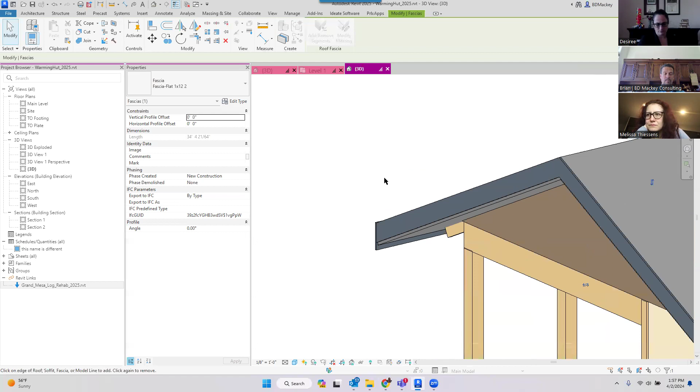So for me, even in a situation like this, I'd be deleting that one, grabbing this one and saying, add or remove segments, let me add this. But to get from a 6-inch to an 8-inch situation, no, there you go, that's what you get. You can try to pull the grip out to make it come to the edge if that's what you're looking for, but you're not going to be able to get this to do anything else that you're going to want to do.

So hopefully that answers the question. No, you can't. Yeah, that's a sad answer. Paint tag, I think we still have that in the chat. I have no idea what it is because I can't keep track of the chat always.

It says, can you show me how that tag for your paint P1 works, the one with the elbows on both ends? It's independent. So if I grab - I think I broke some stuff here, I think my tag has 2 things on here - if I pull that out, it is not. So I do have this as its own individual, it's just a detail component family.

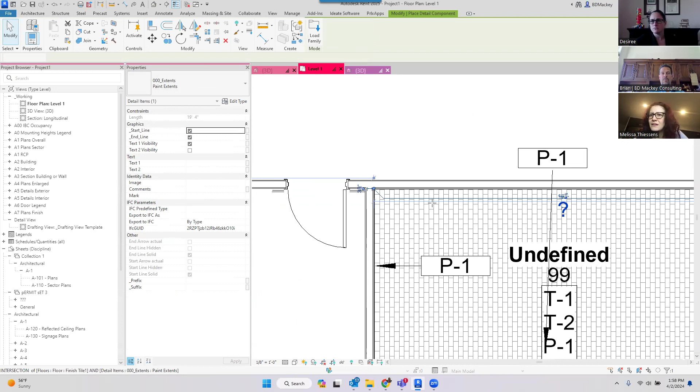If I go say create similar, I can be like, cool, I wanted to draw that over here. I'm going from this point to this point, right? Oops, should have flipped it. I get that. I have the capability to turn the text visibility on if I want to. I have the capability to turn off the start or end lines in case I'm going around another corner or whatever it is. But it is not part of the tag.

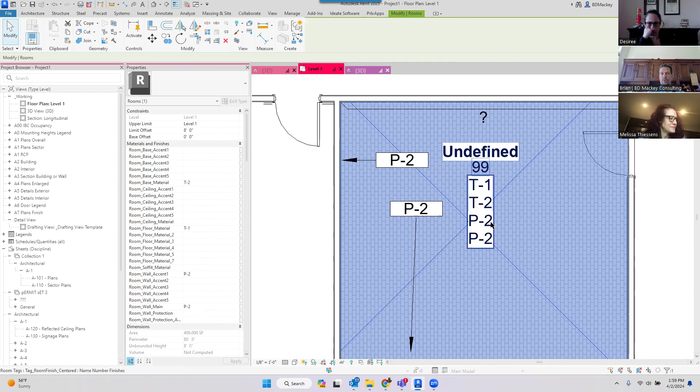For me, the tag is getting into - this is actually a room tag, right? So if I select this, you'll see it's a room tag tagging my main wall finish. So if I were to grab my room - I hate freaking tile - if I were to come in here and grab my room and go, ooh, that main color is no longer paint 1, it's paint 2, and I change it in my room, all my tags that are extracting that main color are going to update.

I could also do the same thing, cut a section or an elevation and tag that same room tag, making sure I'm using the main color versus accent 1, accent 2, etc. So it's not a single tag. This is going to be just a detail component family I place in.

But my tags do have reference planes built into them, so I can come in and align this to this. I do have those values so I can align it and get it set up where it should be.

Well, and there's new multi-alignment for annotations, right? Yeah, I have no idea how to even do that. Oh cool, look, it's up here. Yep, this is not one I played with in the beta. Align them to the top. No, align them to the bottom. I think that might be nice for my shop drawings. Align to the bottom. This one? Nothing's happening. Maybe your leader.

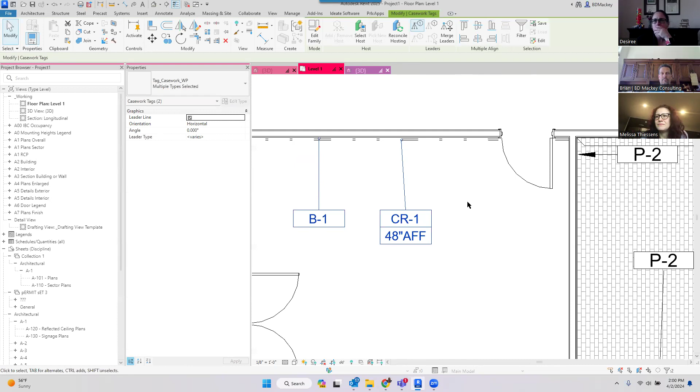I assume there's one up in the chat too about the wrapping. I assume you picked up on that one too. No, these aren't aligning because it thinks they're aligned, because technically the insertion point there and the insertion point here are in the same location. So this insertion point's there. If I broke these and then said align bottom, then they align. So if you have any quirks with your generic annotations and the insertion points being in weird places, it's not going to work for you. Which is pretty much all of them ever. Exactly.

Okay, I don't know if you answered this one directly, but I feel like you probably hit on it in all the wrapping that you did. I have not liked to use the wrap at the ends because you cannot snap to the core wall at the ends. Yeah, I hit that one. Got that one? Okay, I thought you did. Yep, I was tinkering with my, I was getting angry about the align and lock walls at that point.

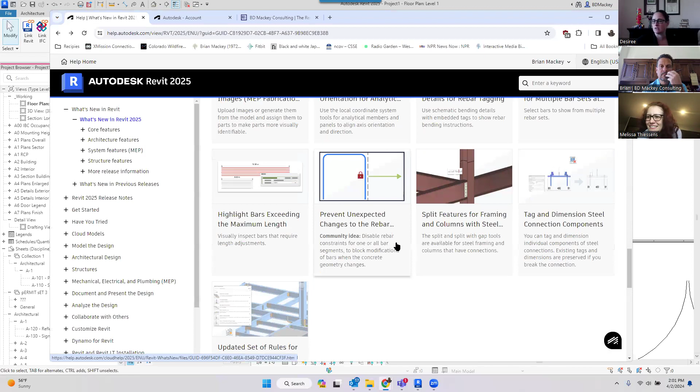Have you run into any limitation for the new multi-loops for mullion profile family? I have not, and that was the one I was trying to look for in the what's new. So mullion profiles don't have to have a single sketch line, which we've always been limited to in every single profile. Mullion profile families can actually do two sets of lines or multiple sets of lines. I don't even see it in here. Multiple loops, there it is. So you can actually, cool, there's no picture in it, but you can actually have multiple loops in there now.

So before we could only do a rectangle or a circle, but now we could actually have a rectangle inside of a rectangle to get a little bit more realistic looking mullion. I have not played with it. I honestly don't know if it's going to be worth it because I can't imagine adding all the extra faces in large projects. Because if you think about mullions in Revit, the mullion isn't one continuous thing going vertically up the building, everywhere there's a grid segment it breaks it. So now I'm adding those additional 4 faces to 3,000 mullions. Is it something that's going to be worth it?

Sure, your floor plan will be cool, your section will be cool when you look at it, but 90% of the time I'm looking at those at an 1/8 inch scale where it doesn't matter. Same thing for me, I don't actually nest detail components like the out-of-the-box one does, because again, now I'm adding that detail component 3,000 times and it just really starts to blow up the size. So I haven't played with this, haven't looked at it at all, but it might be something to get into and start looking at.

Oh cool, yes you can do it. I know John Pearson literally just tweeted today, he took the Shining maze, made it a mullion profile and put it into a mullion and did it. And I'm like, cool, but yeah, I just can't imagine how that would blow up my file, I don't personally think, for a lot of gain.

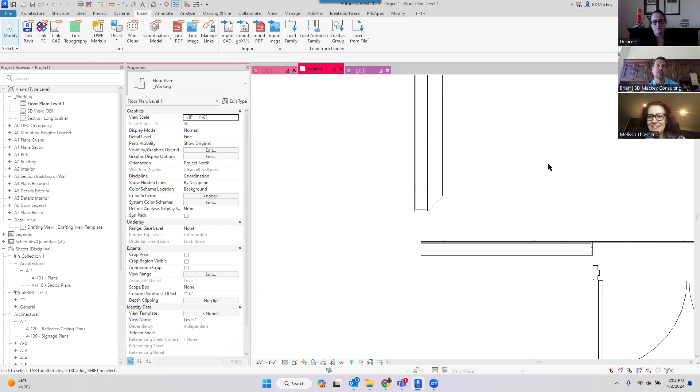I think that's all the ones we may have missed. You just have your email from Jason.

Yeah, so Jason had a question: what if we have a match line in dependent views and we've got a callout spanning both of them? So we're going to come in here and just go into, no sorry, match lines are on the view tab, I always think they're on the annotate tab because it's an annotative tool, right? So I got a match line here. Cool.

And now on either side of that match line, maybe I'm doing a callout that spans both of those. I don't think this is that big of a deal because personally I almost never use the callout tool. I don't like my callouts being dependent on the view itself. So for me, when I do this stuff, I go create a floor plan view.

I'm going to do my enlarged plans. Okay, so now I've got my enlarged plan, right? That enlarged plan, we change the phase. It is the right phase. Phase filter will be none. Let me just turn off the discipline.

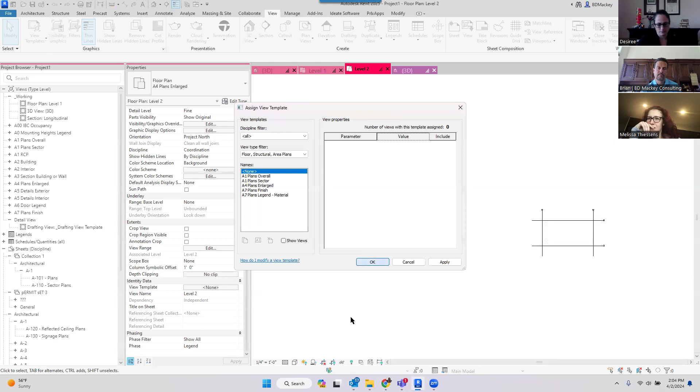Oh, I did it for level 2. Pay attention when selecting floor plan types, make sure you're on the right level. In the enlarged plans, I needed to do it for level 1. Oops, I already had one, but that's okay.

So what I do, this is how I do it: I just go turn the crop region on, and then I make my crop region where I want that callout to be. I know this seems tedious and more of a headache than what most people do, but I do not like my callouts being dependent on the bubble. So then this is going to be my...

Jason view, right? So now back in each one of those dependent views, or even if they're separate views, I can go do my callout, but just reference the Jason view. So now I can say, cool, here's going to be one bubble. I'll take this bubble here and move it around to the other side, since that would be dependent on that side. I'll even just copy that one over to here because they're just referencing—pull this bubble over here. That's how I would do it.

It's the same view, I would just do it this way. That's how I always do callouts. I almost never use the callout button unless it's going to be a detail callout in a section or something, where there's no reason to create a whole new section. But for floor plan callouts, I just don't use it, because now my bubble can be as big as I want without affecting the crop region of my other view.

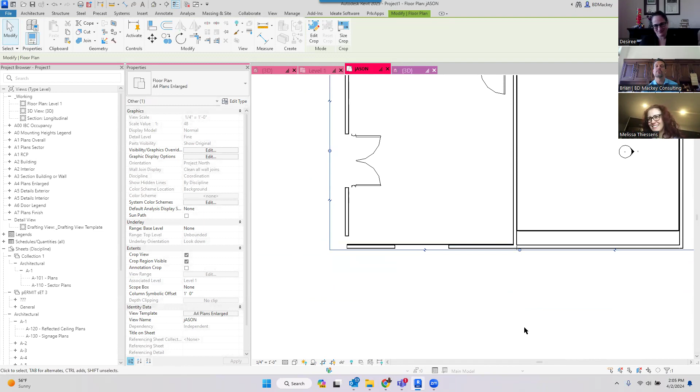So you're lying? Yes, but 90% of the time it's like, oh, I wanted the bubble to be cut tight there. I want this to be out here so I can see that door, or maybe I don't care—I want to be really close to the wall, but back here I needed to pull that bubble out here.

So you've got a match line—would you not use dependent views and create actual separate ones? I am also not a big fan of dependent views. I don't do a whole lot with them, but even when I did, Jason's issue was that in his dependent views, he had the bubble just disappearing. So when he had one big bubble across dependent views, the edge of the bubble would just disappear.

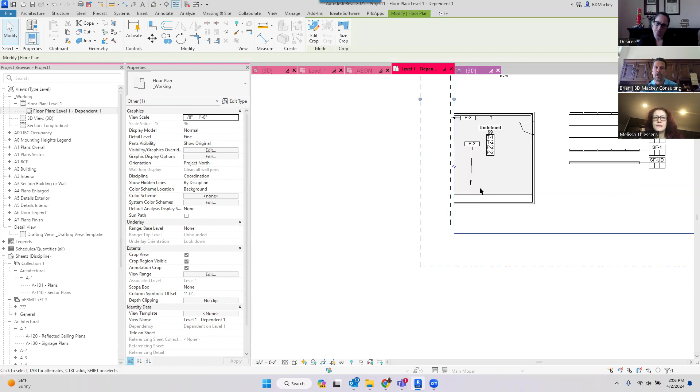Okay, so if I come back here and check which floor plan I'm in, right-click, duplicate as dependent, turn my crop region on. So now if we take this crop region and go really close here... but you'll start to see that the callout bubble is going to be gone because it's outside the annotated area. I also don't use dependent views—I'm not a big fan of them.

So, yep, hopefully that answers Jason's question. I think you got them all. Beautiful, and only 7 minutes over. One of these days I will actually do a Revit Radio in time. No, I won't, and I don't care.

Well, thank you everyone. And as you play with new features of 25, let me know what you can find that breaks it, because obviously all of my doors have broken the new join feature. So I've got to be talking to some Autodesk people on that one.